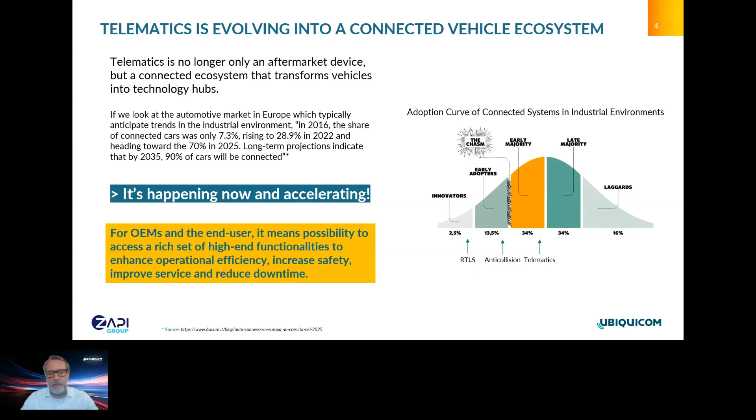If we try to provide a structured view on the type of value drivers that a connected ecosystem can bring to the market, we organize this into visibility, compliance, automation, and orchestration in terms of a pile of growing value that we can bring into the market.

When we talk about visibility, we mean the fact that by being able to trace fully movement and data coming from vehicle, from pedestrians, so from employees, and eventually from assets, actually we have a full understanding of what are the process within a specific work environment, and there is a lot of opportunities of improvement that we can do at this level.

Compliance, in the same way, combines regulations elements with quality elements. If we consider that we know what a vehicle is doing, when a vehicle is working, where a vehicle is placed, of course, there are a lot of elements in terms of compliance and quality that we can build and we can extract from that information.

We can automate a lot of activities of resource utilization, resource reporting. In the same way, considering that we know what are the activities that need to be performed, simply connecting, for instance, with an ERP like a WMS system, and we know where the vehicles are and we know where the employees are, we can definitely orchestrate flows of these different resources and significantly improve efficiency within a production or logistic site.

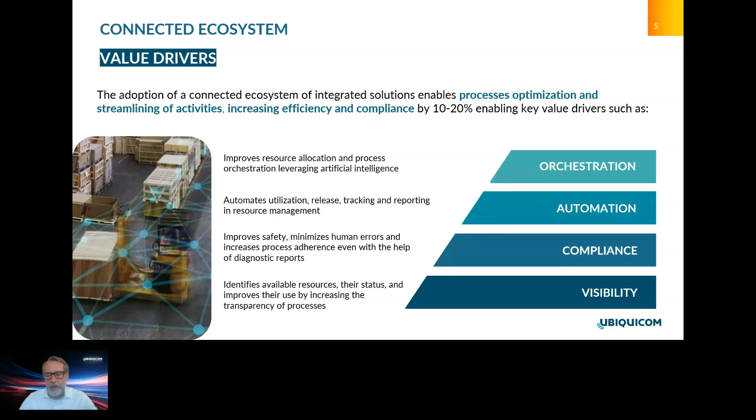If we see how in this slide we have tried to make a parallel in the way in which the different technologies which are part of our ecosystem, but any standard connected ecosystem, these technologies support different value drivers that we have identified, of which the final objective is actually to improve in a significant manner safety and efficiency in the work environment.

Looking a little bit more in detail, which will be also the subject of this presentation, we will highlight what are the supporting business case behind this technology.

Specifically, telematics support a business case for the OEM, as it gives transparency on the way in which vehicles are used. It provides a business case to the leasing, a business case to fleet managers, a business case to rental companies, as it provides means to understand how these resources are used, provide remote diagnostics, improve service as well. And it provides a business case to the end user.

End user also in large organization not always have a clear visibility on how the fleet is used, and having this type of information allows significant improvement in the resource usage and, of course, cost of executing work on the production and logistic floor.

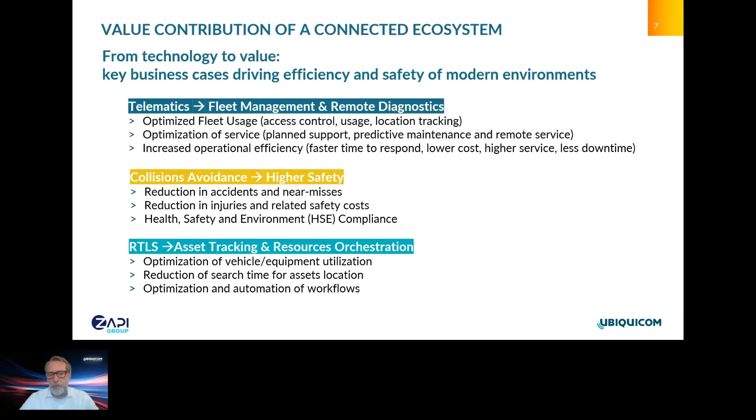So in the remainder of the presentation, I'll spend some time driving through a number of real-world examples where we have implemented these technologies, both at the end user side as well as the OEM level, typically always for large and international corporations or for some relevant Italian companies.

So we are covering now the fleet management use cases. Specifically, among the different systems that we have implemented in these last 20 years, we have implemented fleet telematics systems for the European branch of Mitsubishi, which is composed of operations in 9 different EMEA countries, as well as for a large transport organization, one of the largest European but also worldwide leaders in transportation, for a specific use case of temperature control.

Of course, the key drivers of a telematics implementation are always the opportunity to provide real-time visibility of vehicles, being able to trace these assets in the field, and mainly improve resource usage and resource allocation, as well as in some situations implementing flexible contracts.

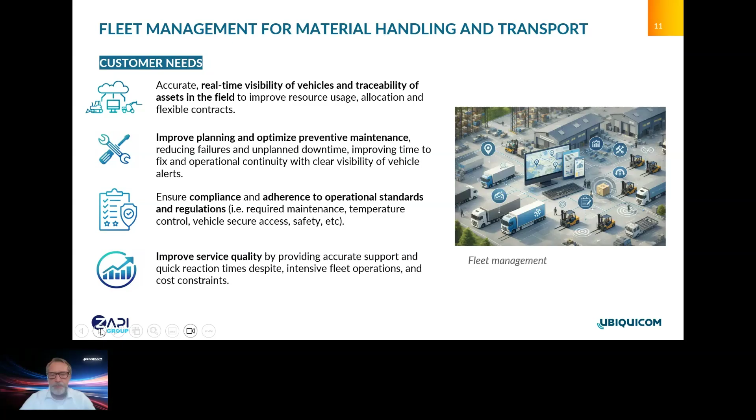And provides users, which are OEM dealers and end users, access to a portal to this rich set of information and perform high value activities such as predictive maintenance, very relevant on monitoring battery health, an expensive component in an electrified vehicle, remote diagnostics, understanding what's going on in a vehicle, avoiding on-site visits and expensive support service operations, and provide to the OEM the opportunity to perform over-the-air software updates.

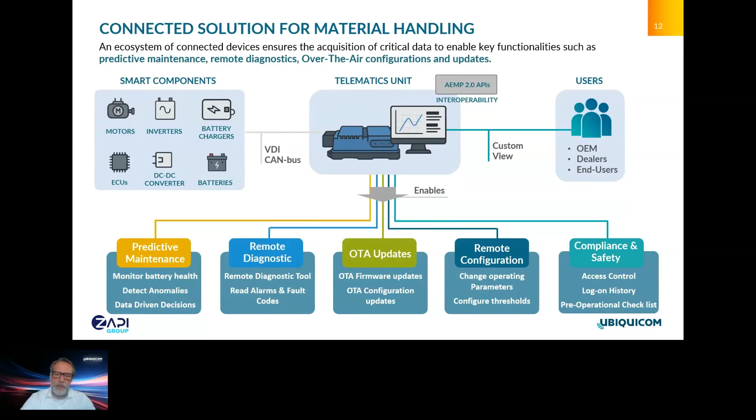As I mentioned, these solutions are enabled through a rich portal, and through the portal we can collect data, perform reporting, log alarms and notifications, being alerted. We can manage all the administration tasks, such as flexible contracts, eventually some operational tasks with dealers. Of course, understanding the locations of the fleet, as well as, as I said, access control, logging all the operators, their badges, and managing the status of their licenses and driving permits.

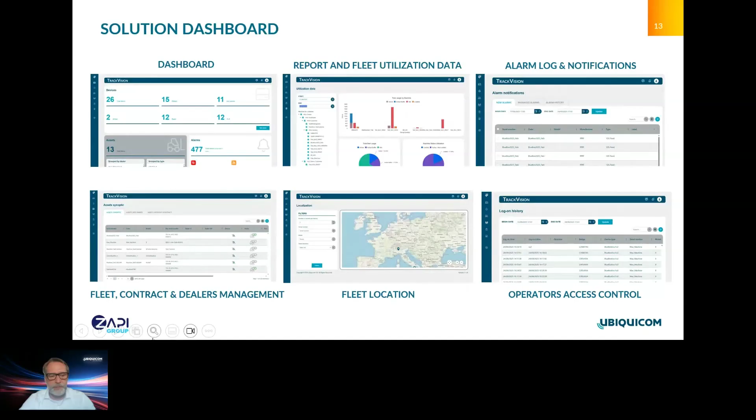As we're moving in a different way in which we can enable the value of telematics, specifically, as I mentioned, in the transport sector, in this case we have improved significantly the cost of temperature tracking solutions, as well as tracking fleets in the field. Whereas in previous situations, without a telematics component, every temperature sensor, they were called data loggers, needed to have their own connectivity to provide real-time information to the base, or this information was happening at the end of each trip, on a daily basis, or on a weekly basis, providing delayed information.

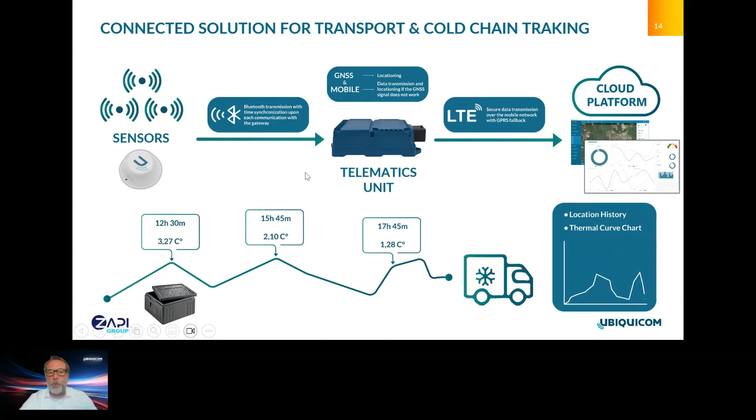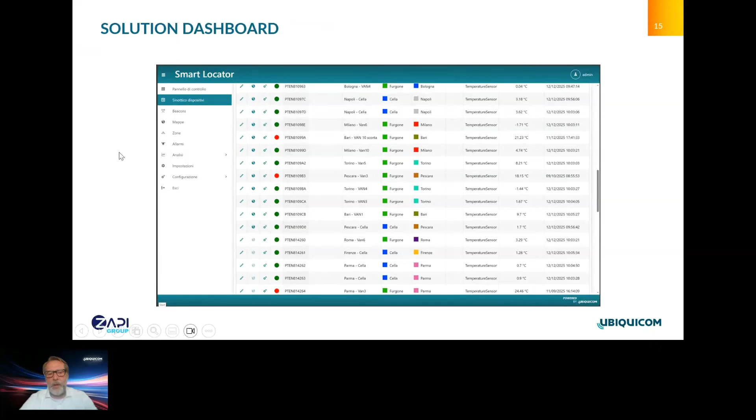Whereas today, with a simple sensor which connects to the telematics unit, we have full traceability of temperature in real time, from the cold room up to the doorstep when, for instance, goods are delivered, since the sensor keeps tracking information and downloads that information to the telematics unit when it is in reach of the telematics unit, or the cell control in the cold room. Again, there's always a software component which provides detailed visibility of every sensor, be it in the cold room, on the vehicle, or in the field while the goods are delivered.

If we move into the safety and industrial use case, this is also a use case which gains value being implemented on top of telematics solutions. We have selected a few use cases in the industrial sector, typically in recycling, plastic recycling, in paper mills, and as well in a situation where we have an interaction between man and vehicle and automation, which is in the agriculture sector, through follow-me type of solutions.

So if you look at the specific needs of the customers, the requirement was to be able to reduce risk on recycling waste management sites, where there was a large variety of vehicles within the site, and interaction between vehicles and pedestrians. At the same time, it was also important to be able to trace and track the movement of both vehicles and pedestrians, because it was important to create advanced rules, for instance making sure that some specific areas would be clear of pedestrians during critical operations. An example was loading and unloading phases, which of course need to make sure that there are no operators close to where these operations take place.

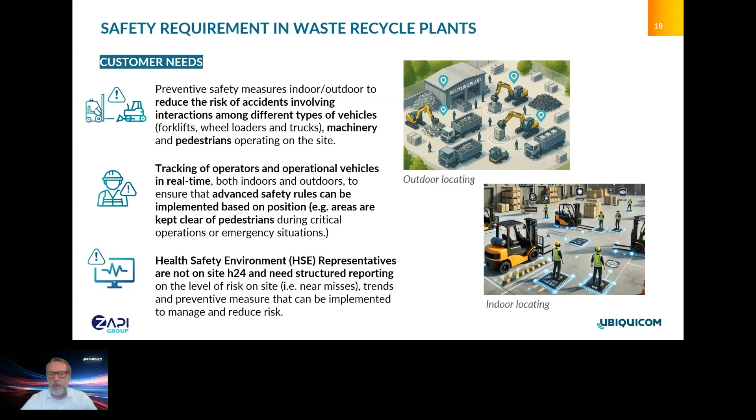Another relevant element, which is often or always present in safety monitoring situations, is the fact that collision avoidance systems improve safety prevention, but at the same time, HSE are not on site 24/7 and cannot continuously monitor the behavior of operators in the field. And therefore, it is important to actually monitor and keep track of what's happening on the site, to be able to provide statistics and reports to the HSE, understand what kind of risks are being detected on site, and what kind of preventive measures can be implemented.

Therefore, indeed, a full end-to-end solution does not only take into consideration the operational collision avoidance among vehicles and pedestrians, but there's also a number of preventive measures, and it typically requires being able to trace information, to collect near misses, and to be able to produce risk heat maps or risk reports to understand where the danger is, where the risk is, and what kind of preventive measures can be implemented.

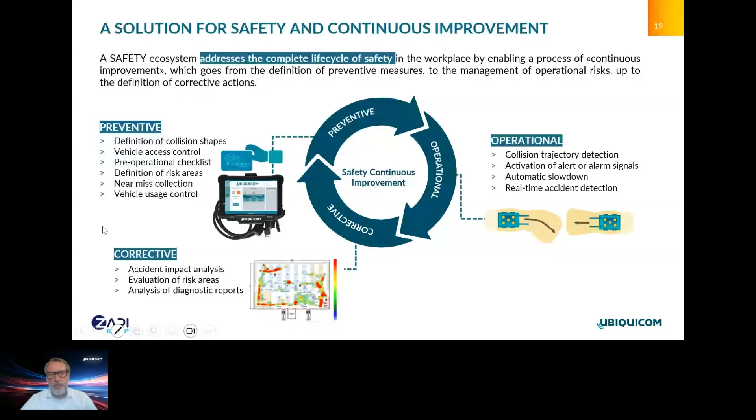So if we just look at the typical use cases, as I said, if we go down, one step is of course collision avoidance. It's not only collision avoidance; it's also, for instance, accident detection. Accident detection means being able to detect an important impact, and on the basis of that impact, for instance, deciding to lock the vehicle and require supervision.

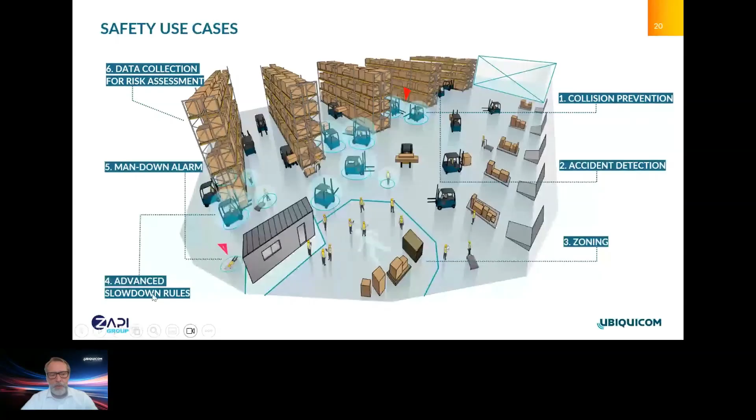We need to be able to manage safety areas. So, for instance, force slow down on specifically clearly identified areas. That could be an area where there is an interference between vehicle and pedestrians. It could be a specific crossroad. But we might be able also to implement advanced rules and as well, for instance, collect man down alarms. In these three cases, so slow down, man down alarms, as well as data collection, risk assessment, the role of telematics is fundamental, because these types of functionalities cannot be implemented without connectivity.

So if you look at the specifics of what it means, the typical use case of collision avoidance, they imply, of course, vehicle to vehicle of different types, vehicle to pedestrians, man-machine interaction. So it could be robots, it could be belts, it could be AGV and pedestrian. AGVs have their safety mechanism. They typically use LiDAR. On the other hand, LiDAR is not able to detect if it is colliding with another vehicle, or colliding with infrastructure, or colliding with pedestrians.

And of course, typically the safety distances are different, and therefore knowing also in interaction with the AGV that I'm interacting with another vehicle, or that I'm interacting with pedestrians, is relevant to improve effective safety measures. An AGV can pass very close to infrastructure, but maybe not so close to a pedestrian.

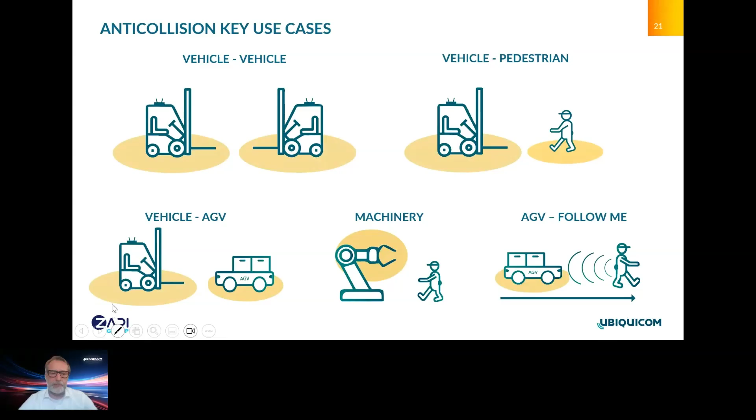So if we look at different types of configuration, considering that safety can have different levels of requirements depending on the site, it is important that a safety value proposition is modular and can be scaled. So a typical configuration is a local configuration where collision avoidance, or let's say radar systems, are installed locally on vehicle, AGV, and pedestrian. It can be confined, meaning that we can add infrastructure to improve safety at specific areas, as I said, a crossroad, or an area where, for instance, vehicle and pedestrian are collaborating.

But at the same time, a more high value type of situation needs also to understand the exact position of pedestrian and exact position of vehicle within an industrial or logistic site, to implement what I mentioned before as advanced rules. For instance, we need to slow down vehicles in the morning while they are loading and unloading bays from 8 till 12 o'clock. We need to make sure that when we have a congested situation, or too many pedestrians or too many vehicles, we force a slowdown of the vehicle. This type of situation can only be done when we know the exact position, and not just the relative position among vehicle and pedestrians, and therefore connectivity and real-time locating systems are required on top of a local safety system.

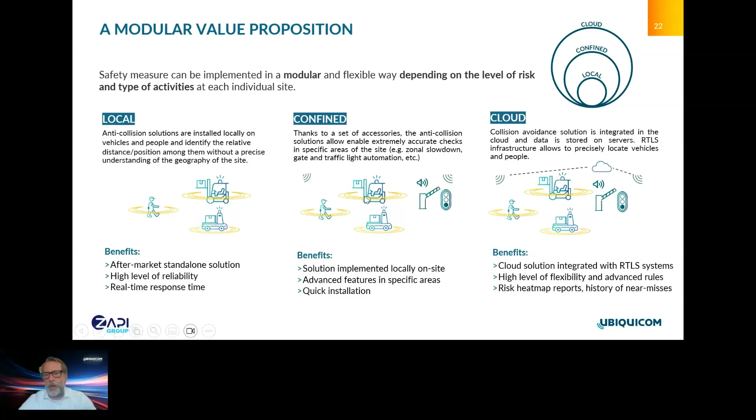Yet again, in this type of situation, there will always be a local solution as well as a connected platform. And through the connected platform, for instance, in this case, we would be able to identify areas of the site, design fences, nested fences, a specific rule applied on those fences, trace information on the movement of the vehicle, the interaction among vehicle and pedestrians, generate a heat map,

and eventually notify events, as for instance an impact of a vehicle, an accident of a vehicle, so that we alert the supervisor on the site, so that he can have a clear visibility of what's going on, the type of impact on infrastructure, making sure that an infrastructure does not collapse due to multiple hits, and therefore have a more transparent and a better view of the risk on the site.

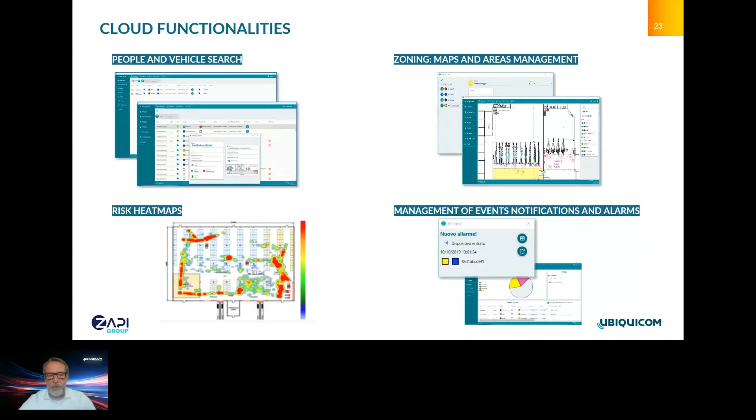Collision avoidance applies to multiple sectors and to a wide variety of vehicles, and therefore, yet again, being able to provide modular and flexible collision avoidance safety systems is fundamental to be able to address this market.

We're moving now to a use case of optimization of ground support operations. We have different situations which we typically address. This can be the ground services operations within the airport, as well as the facility management within the airport. We will address now a use case that we have implemented for, yet again, a large international transport operator, specifically in the cargo sector,

where actually there were significant challenges in locating container dollies within the Malpensa airport, which is of course a very large area. Dollies are not intelligent, therefore it's very difficult to determine where they are and where there are empty dollies that can be used during the operations. And therefore, of course, the challenge that the customer was facing was overstocking dollies for its own operations.

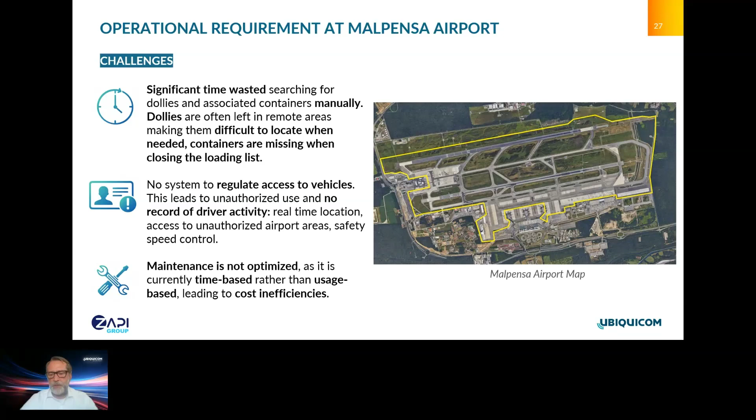So the situation was, as you can see, managing a fleet of very varied types of vehicles, from dolly, belt loader, operational vehicles moving on the airport, tractors.

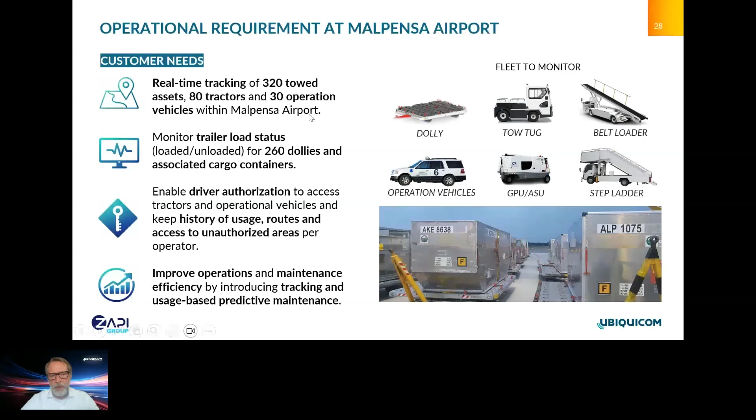The use case we had to implement for the maintenance team was being able to trace the dollies or vehicle utilization and the number of kilometers performed, to determine when maintenance was required and find where the specific dolly was located. At the same time, the tractor drivers, when running out of dollies, needed to identify where empty dollies were available. The control tower, managing traffic and the loading of the aircraft, needed to make sure the loading list was completed so that the plane could take off.

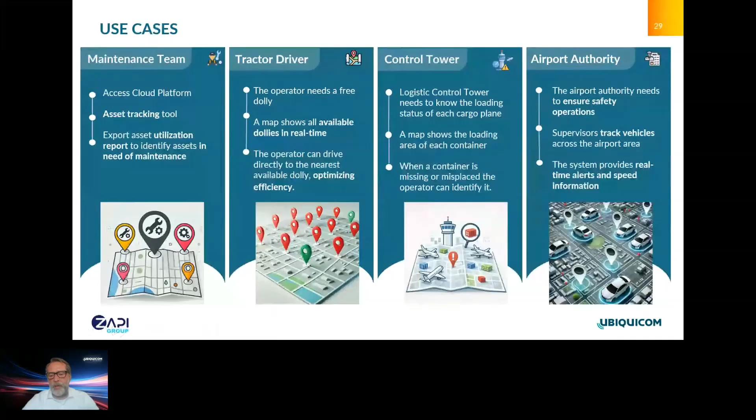Often a container was missed, or placed in the wrong bay, and therefore it was problematic to find that missed container. And all of this had to happen under the supervision of the airport authority, which needed to make sure vehicles were not exceeding speed limits and were not going into unauthorized areas of the airport.

So the solution we implemented has been a mix of telematics, safety, and tracking services, typically installing a telematics component on tractors and operational vehicles, as well as active tags on the dollies. All this information was collected and flowed to a cloud platform, providing access to the relevant people mentioned previously, meaning the maintenance team, airport authority, logistics control tower, as well as operators running in the field.

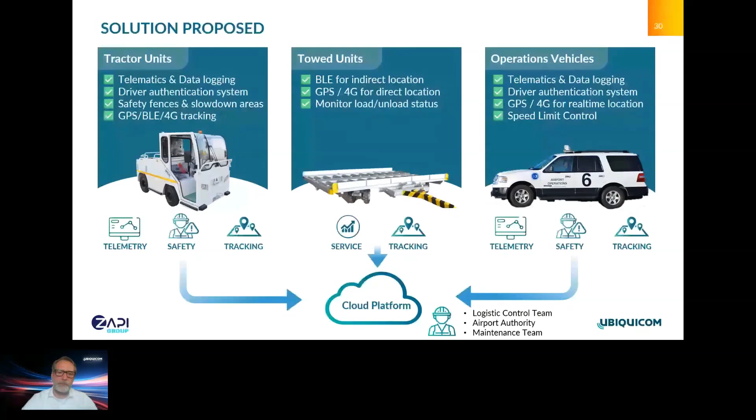It's a small example of the platform as well. You can see that on the airport we could locate all the different elements. We can type them so different objects have a different color, distinguishing dollies from tractors from vehicles. For the position, you might see some specific fences being defined, so rules can be applied on those fences, as well as the possibility to trace and calculate the movement of each specific dolly, so we could maintain the number of kilometers performed by each dolly and determine the right sequence and maintenance moment for each dolly.

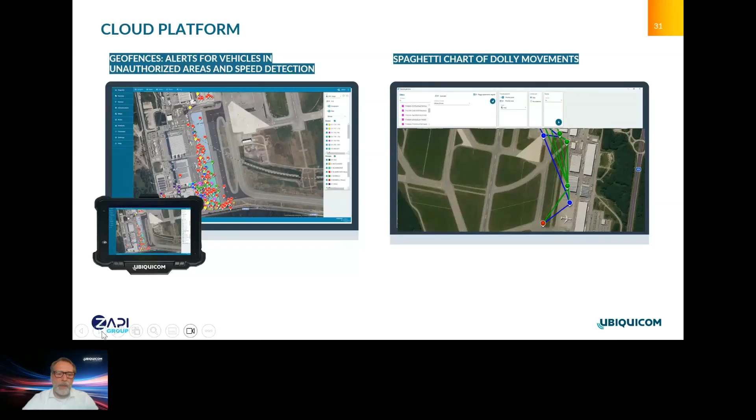Moving to the next use case, this is an application, or part of our offering, which is a position-based optimization that we perform typically in warehouses or production environments. These are two large, relevant Italian 3PLs and 4PLs, whose business is outsourcing operations for large corporate companies, and their main driver is maintaining - since we're talking about high intensity warehouses - high traffic speed in the warehouse. So safety is an important concern, and safety does not have to come at the cost of productivity, so improving productivity and specifically service is a relevant goal for these players.

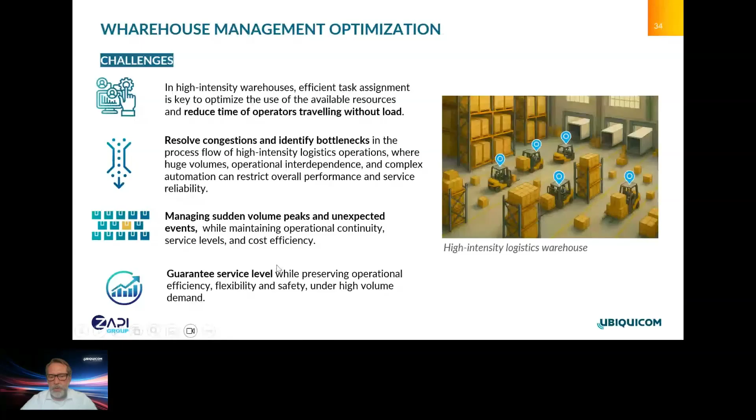So again, one of the objectives of the solution we implemented was reducing the time and distance that operators would spend traveling without a load in the warehouse, resolving congestions and bottlenecks that happen when there's high traffic within a site, as well as being able to effectively manage volume peaks and unexpected events, which are situations difficult to manage without adding overhead. All of this with the goal of guaranteeing service level, and often service levels with the ability to perform tasks when required - for instance, finishing the load of a truck and guaranteeing a certain service level is often more important than the cost of the overall operations.

The solution we have implemented is called Synchro. Synchro gives us the possibility to model the warehouse within a software platform, knowing the stock positions, the layout of the warehouse, where the alleys are, where traffic will be managed, and interfacing our platform with the WMS. We can collect all the task waves that need to be executed on the operational logistic floor and optimize them by having an understanding of the warehouse, a map and model of it, and also knowing in real time the position of the operators.

Therefore, the objective of our algorithm is to perform forecasting in the future and create a list of ordered tasks, making sure each operator performs an optimized sequence of tasks. The objective of this system is not only to guide or navigate an operator within a warehouse. A warehouse is a fairly simple structure, so we don't need to give instructions on how to move, but we need to create the right sequence of tasks to make sure he performs them in sequence to optimize his movement within the warehouse.

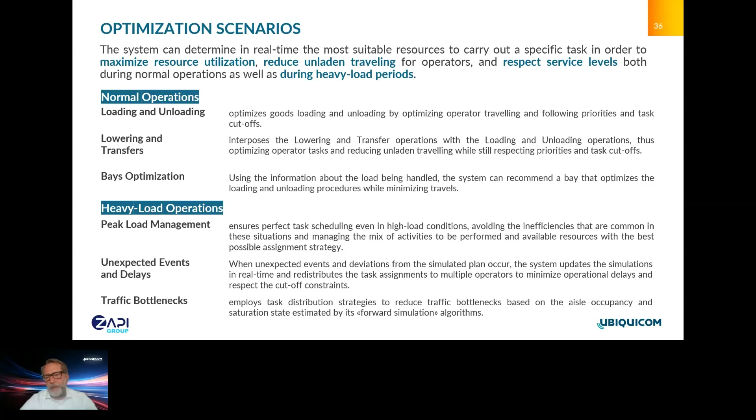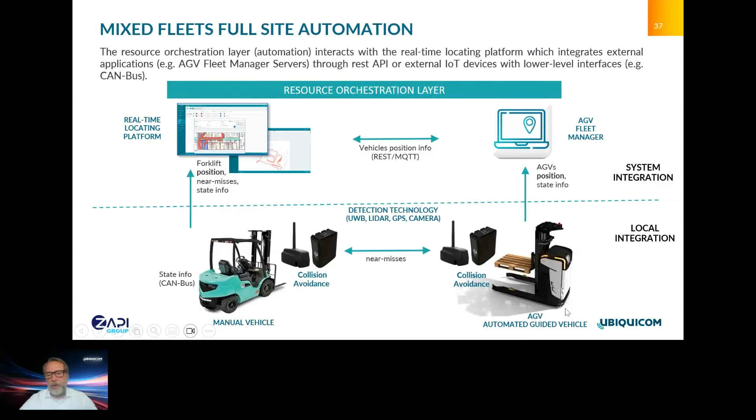This solution works on top of fleet management systems, and therefore can be implemented to optimize the scheduling of a manual warehouse, but it can also work at a higher layer, mixing a fleet of manual vehicles together with a fleet of automated guided vehicles.

The dashboard provides a digital twin of the warehouse, so it's possible to see in real time the position of the vehicle, what each vehicle has been executing, productivity of each vehicle, idle time, level of usage of resources, providing a tool with high visibility of what's going on in a warehouse and an opportunity to optimize the usage of resources.